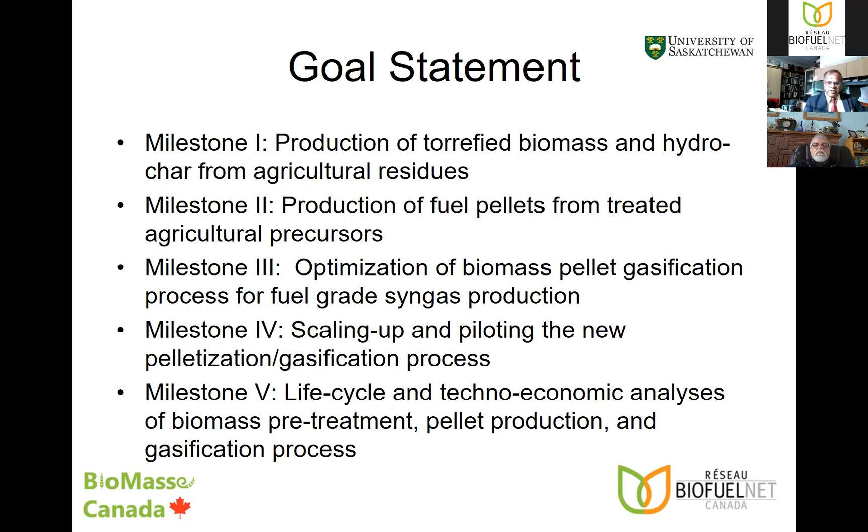Third one is the optimization of biomass pellet gasification process for fuel grade syngas production. And then the fourth milestone is the scale up and piloting the new pelletization gasification process. And the important one is the life cycle and techno-economic analysis based on the work that we would be doing from all 4 milestones related to biomass pretreatment, pellet production, and gasification process.

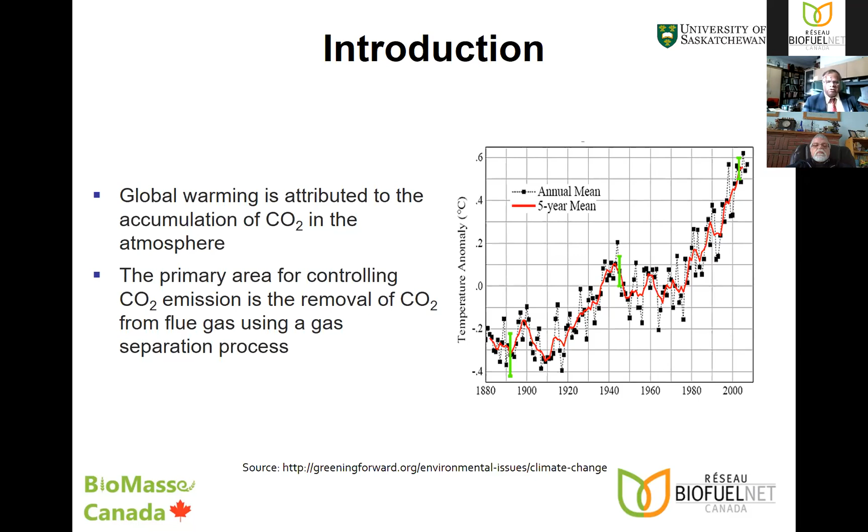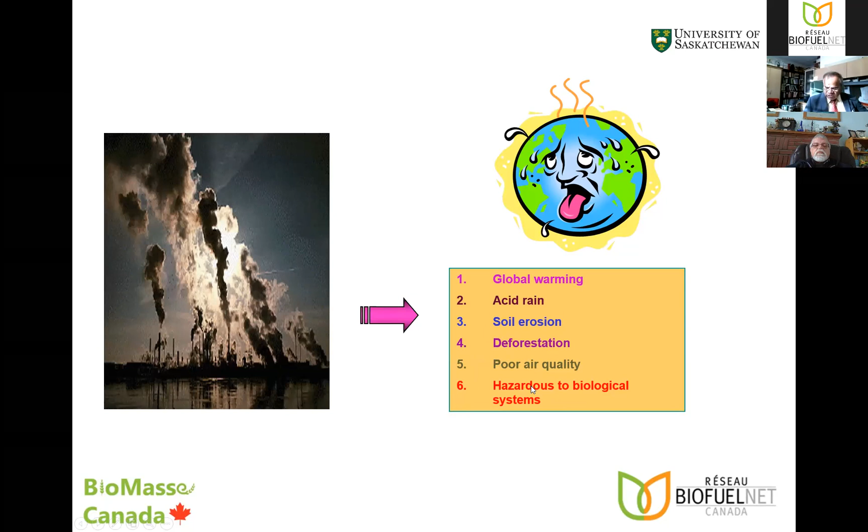And this cartoon again shows the impact of global warming. It causes acid rain, soil erosion, deforestation, poor air quality, and most importantly, it is hazardous to biological systems, including animal and human health.

And according to the Paris Accord, Canada has pledged to reduce its greenhouse gas emission by 30% below 2005 levels by 2030. Developed countries, including Canada, are committed to spending at least $100 billion a year between 2020 and 2025 to help emerging economies deal with the effects of climate change.

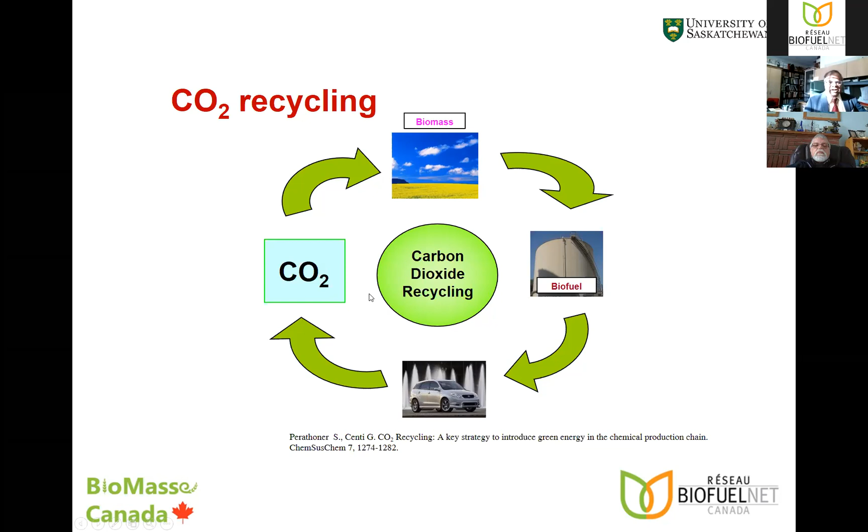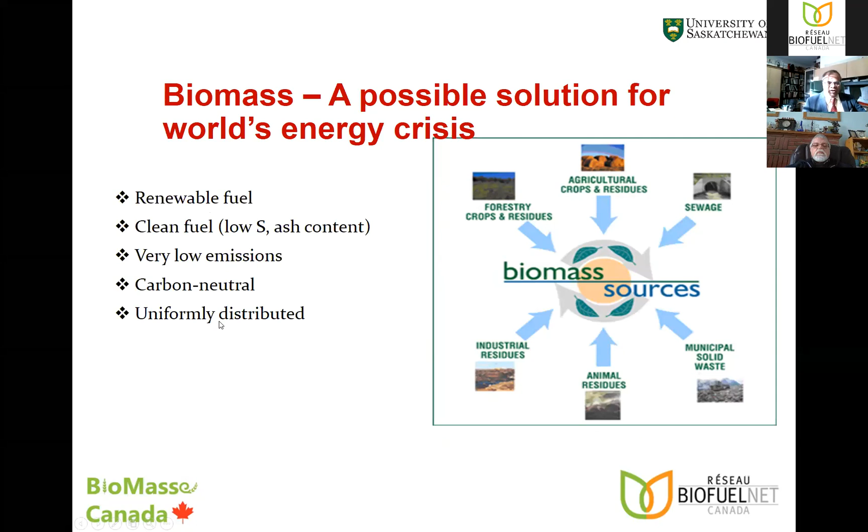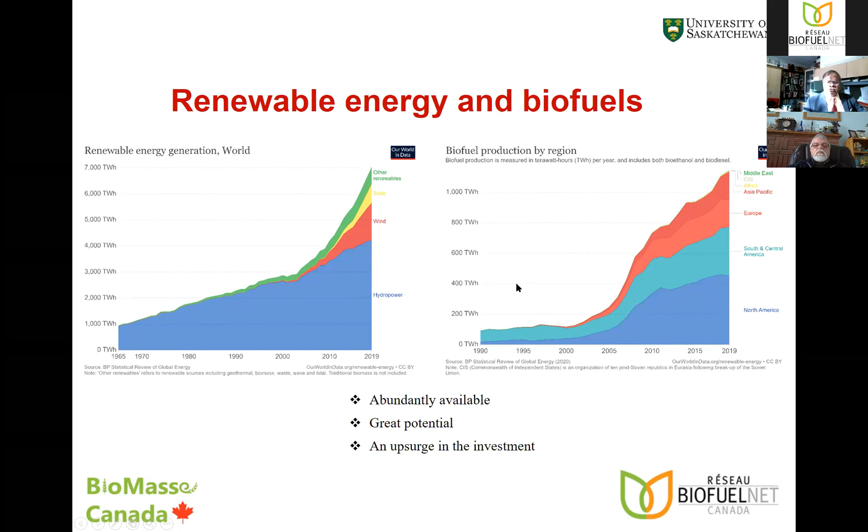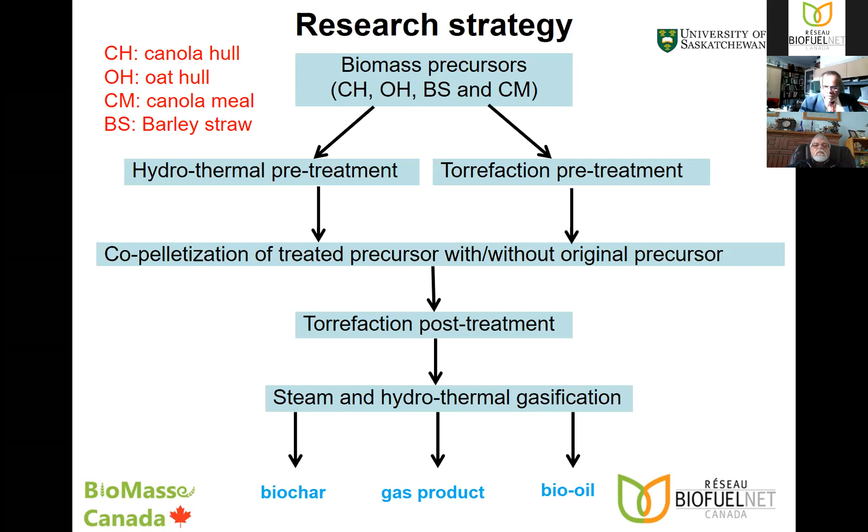So the strategy of this research has been twofold. One is to take these biomass precursors, the canola hull, oat hull, canola meal, barley straw, and mustard meal, and process them through a hydrothermal and torrefaction pretreatment process, and then co-pelletize with and without the original precursor, and also torrefy the post-treatment material, and then get useful products from this material, such as syngas through gasification technology.

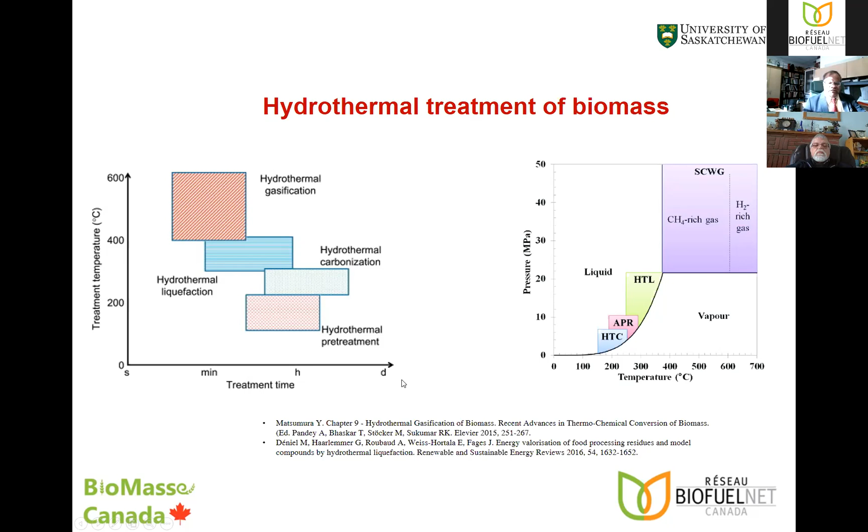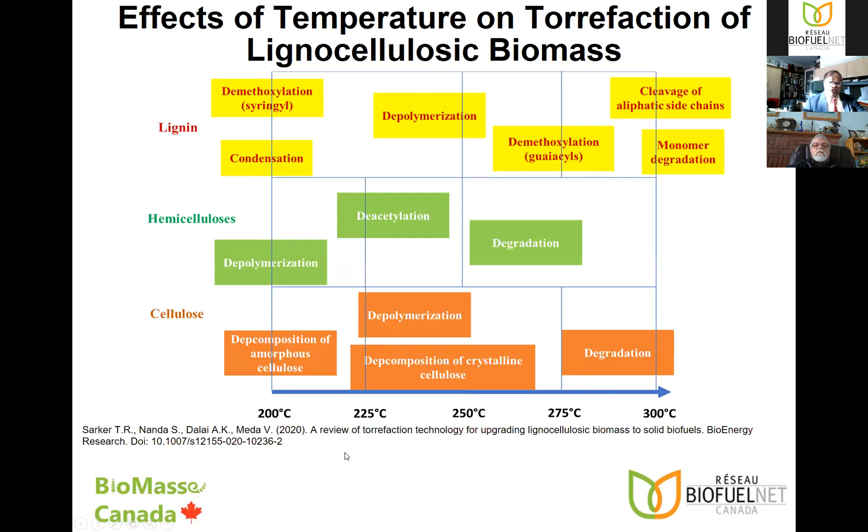And if you look at the bottom here, the hydrothermal carbonization, that's where we generate a lot of biomass with a large amount of carbon, and that translates to the one on the left, the hydrothermal pretreatment, where the temperature varies from about 100 to about 300 degrees Celsius to carbonize this material for pellet production. And in this slide, we see the effects of temperature on torrefaction of lignocellulosic biomass. Lignin, hemicellulose, and cellulose, the main components of biomass, go through different degradation processes as we increase the temperature from 200 to 300 degrees Celsius during torrefaction.

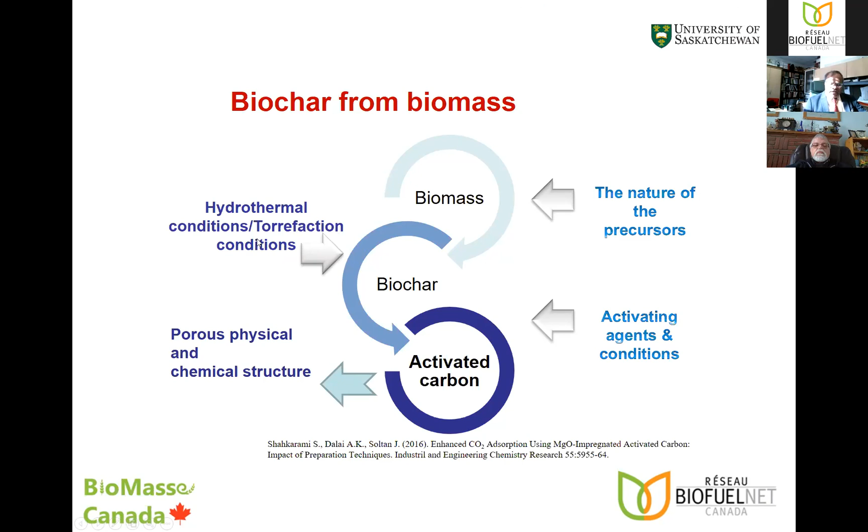And when we look at the biochar production before we pelletize it, the nature of this product depends on the nature of the precursor, and also the hydrothermal and torrefaction conditions, including the temperature range, the heating pattern, and the way we treat them in the reactor. So if you look at the torrefaction technology, as you see here, the temperature varies from 200 to 300 degrees C, and the time is 10 to 60 minutes, up to about 1 hour, with inert gas.

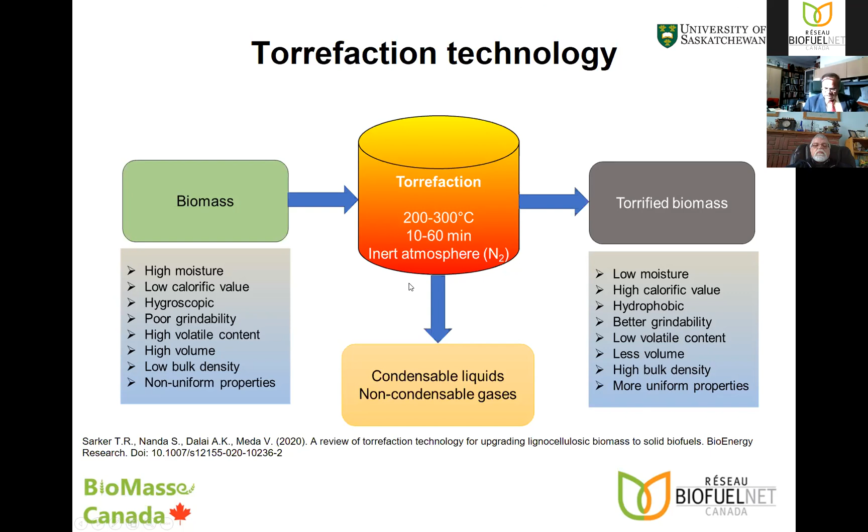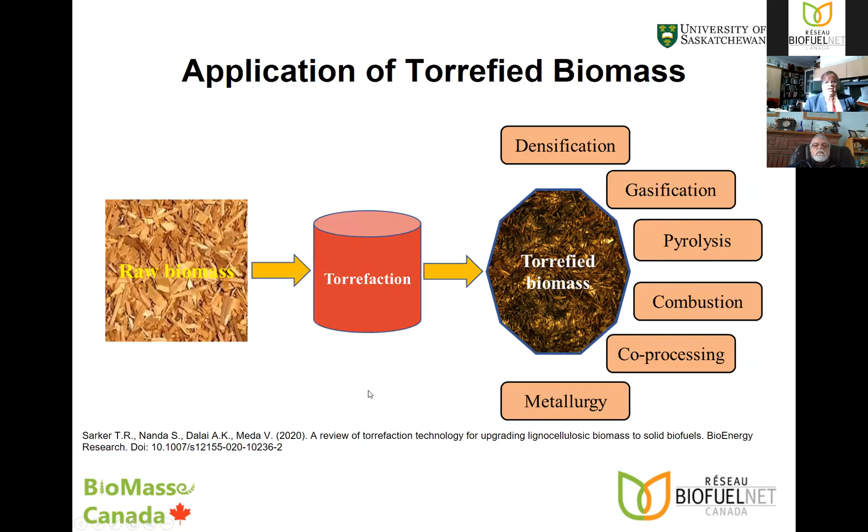And once you torrefy this biomass, you can see that it has many applications. You can do the pyrolysis, combustion, and you can apply for metallurgical application as well. You can gasify, you can co-process. There are a lot of things that can be done with the torrefied biomass.

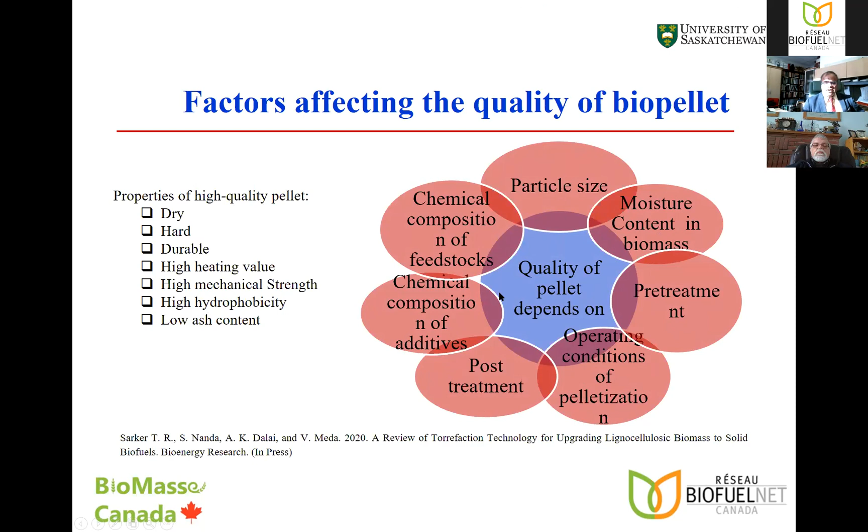And what are the factors affecting the quality of biopellet? The properties of high quality pellet include dry, hard, durable, high heating value, high mechanical strength, high hydrophobicity, and low ash content. And the quality of pellet depends on many things here: the particle size, the initial moisture content of the biomass, the pre-treatment methods, operating conditions for pelletization, post-treatment, chemical composition of additives, chemical composition of feedstocks.

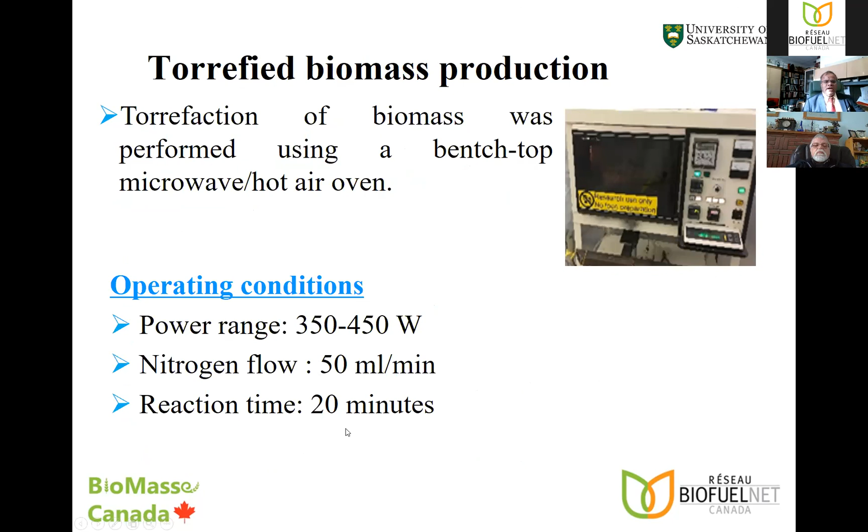And the torrefaction of the biomass we conduct in a benchtop microwave hot air oven reactor, as you see here, and the power range is given, and we do it in nitrogen inert atmosphere, and the reaction time is 20 minutes. So we're producing torrefied biomass as well as the hydrochar through this

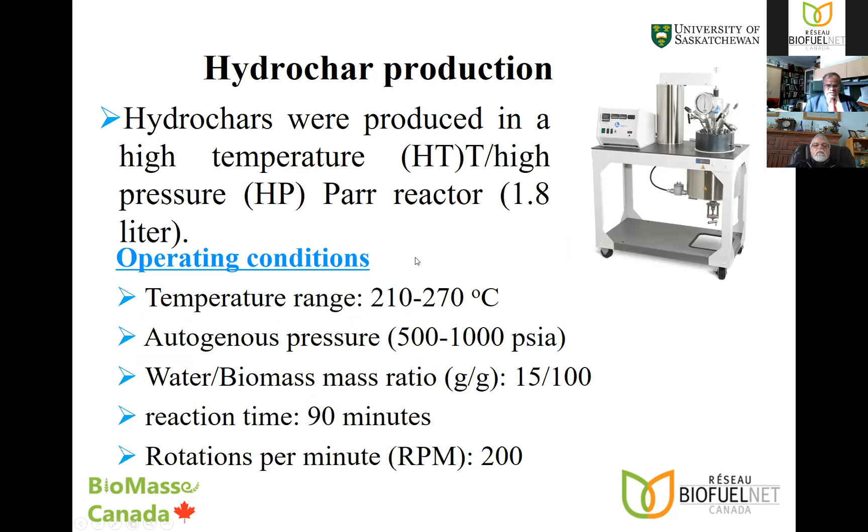carbonization process. And once we do the torrefaction through the microwave oven, you can see that we have barley straw, oat hull, and canola hull, and we subject these to three different temperatures: 220, 260, 300 degrees C for 30 minutes and 60 minutes, and you can see how physically they look, and they gradually produce char, which has more carbon content, less volatiles, less moisture, etc.

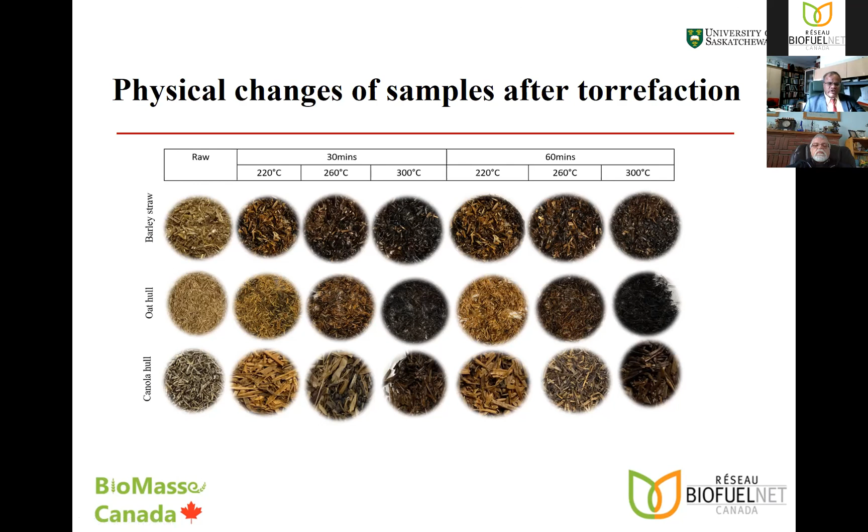And again, these are a lot of numbers, but all I want to tell you is that for the oat hull and barley straw and canola hull, when you subject that to about 300 degrees C through torrefaction for about 60 minutes, we increase the higher heating value from 17 to 20, to roughly 23 or 25 megajoules per kg. So that is one conclusion from this. And also the energy density, which is the energy density of the product over the energy density of the feedstock, has gone up about 37% and 42% in some cases. So energy density is also increased after this torrefaction process.

And also the mass yield and energy yield are varied when you subject this material to torrefaction, and we find the mass yield, which is basically the final weight over initial weight, and here is the energy yield, which is the final weight of the biomass times final higher heating value over the initial weight of biomass times initial heating value. So they are different as you go from 220 to 300 degrees Celsius. In some cases, you can see the energy yield about 92%. And when you subject to very high temperature, both the mass yield and energy yield go down.

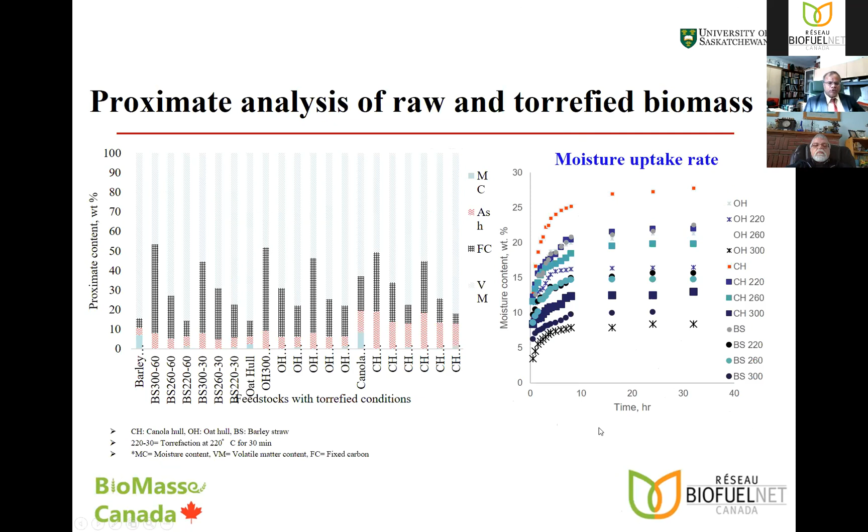And this one, again, is very, very crowded, but all I want to say is that once you torrefy this biomass, it becomes hydrophobic, and the moisture uptake is reduced to some extent. So I just wanted to conclude this part of the presentation.

We find that the torrefaction increased the higher heating value of oat hull by 37, 42, and 32% respectively, and significantly reduced the moisture uptake rate and made the material hydrophobic. And the TGA analysis showed that the torrefaction process makes this material thermally stable, and of course, again, it becomes hydrophobic.

So then we take this torrefied biomass and we wanted to densify it with, again, these are the precursors, canola hull, canola meal, oat hull, and here is the bench scale extruder that we used, with the biomass to water content varied from 1.75 to 2.5. And also we used the canola meal as an additive 50 by 50 on a weight basis. And so we mix them with these parameters, and then subject them to a bench scale extruder to produce the pellet.

And here is the material, the hydrochar, and also the one mixed with the canola meal 50-50, and here is the biomass to water ratio, and here is the relaxed density, which is the density that is measured after 2 weeks. So what happens is when we make the pellet, the density is a bit higher, and after 2 weeks, it expands to some extent. We found that this density is much more valuable or appropriate than the density if you measure just after you pelletize.

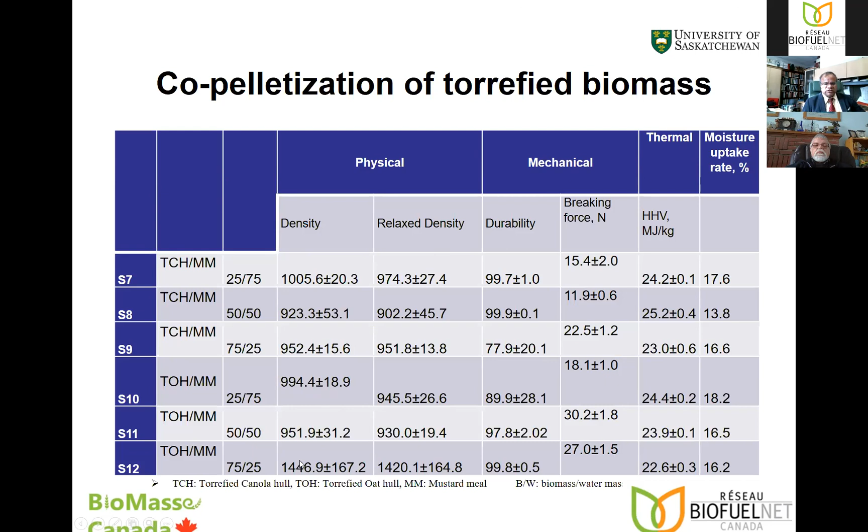And also we looked at the co-pelletization of torrefied biomass with the mustard meal. Again, this is a new material we wanted to test, and we find that the higher heating value is good. The moisture uptake is low to some extent after we made the pellet, and the relaxed density is also very good, and the density you can see is pretty good as well.

So what is the relevance of this work for industrial applications? We find that in 2019 the total production of canola, barley, oat were 19.5, 10.4, and 4.3 million tons respectively in Canada, and 10.9, 4.4, 2.2 million tons in Saskatchewan. So it's about half of Canada's production in all cases. And the amount of canola hull collected is about 10% of the product. So you can see a lot of this material is generated in Saskatchewan, and oats contain about 20 to 30% oat hull. So the idea is to use all this material to produce high quality pellets.

And the relevance to the Canadian scenario is that Canada's per capita greenhouse gas emission is about 20 tons of CO2 equivalent, which is one of the top emitters in the world. And co-firing of fuel pellets with coal is a promising method to drastically decrease the greenhouse gas emission from coal-fired power plants. And these pellets can also be exported to Asia and Europe to produce revenue from agricultural residues. And there are many critical success factors of this project to improve the pellet property.

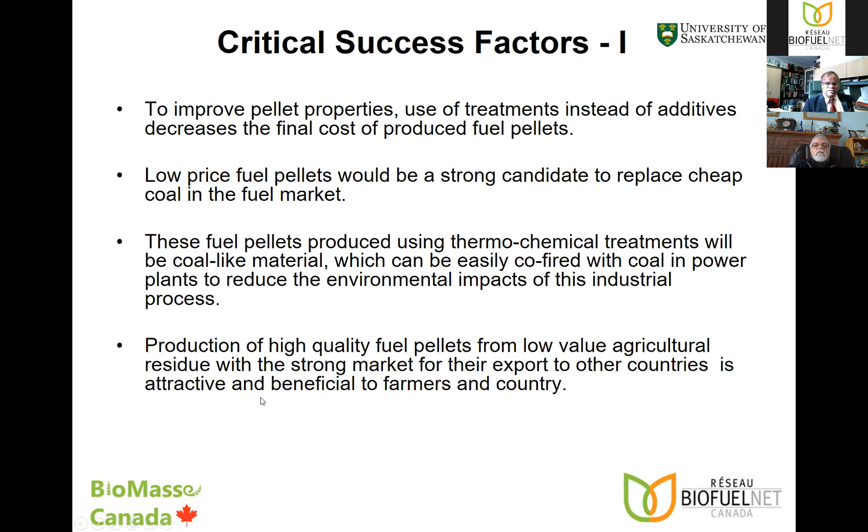Use of pretreatment instead of additive decreases the final cost of produced fuel pellets, and low price fuel pellets would be a strong candidate to replace cheap coal in the fuel market. And these fuel pellets produced using thermochemical treatment will be a coal-like material which can be easily co-fired with coal in power plants to reduce the environmental impact of this industrial process. And production of high quality fuel pellets from low value agricultural residue with a strong market for export to other countries is attractive and beneficial to farmers and the country.

And also there are technical challenges. One is looking at the mechanical strength, moisture resistance, and higher heating value of the pellets. These are very, very important to decrease the biomass fuel pellet production cost, optimization of the process conditions of the treatment process, and appropriate design and scale up of this process as required, and use of agricultural residue for production of biomass fuel pellets provides a new source of income to farmers.

Export of this product to other provinces and countries, again, is very attractive. And this is kind of the flow diagram for fuel pellet production. You can see we have the collection of the raw material and chopping, etc., hammering through a hammer mill, and then the microwave system for torrefaction. And here is the torrefied biomass, and then you grind them.

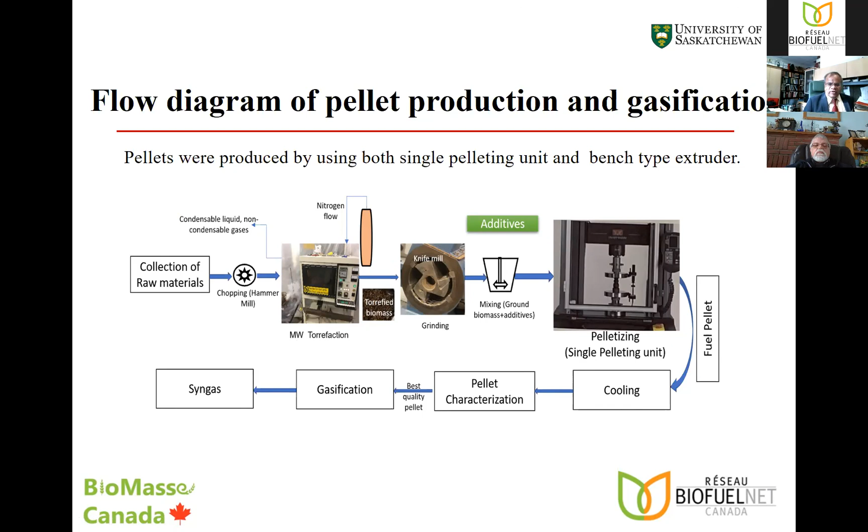And here is the mixing of the biomass with the additive, and here is the pelletization system, and then the pellet characterization to meet the standard, and then used for gasification. And that's part of our project, but they can also be co-fired with the coal for producing power in the coal-fired power plants as well, even for home heating for that matter.

And so the future work is looking at the optimization of the biomass pellet gasification process for fuel grade syngas production. And we have also projects on the conversion of syngas to transportation fuel or jet fuel. So that basically goes very well with the other projects. And we also want to work on the scale up and piloting of the new pelletization gasification process with the WD funding. We are in the process to get a pelletizer from Sweden, and that should be arriving fairly soon, so that we can look at piloting or scaling up with our recipe to produce large amounts of pellets.

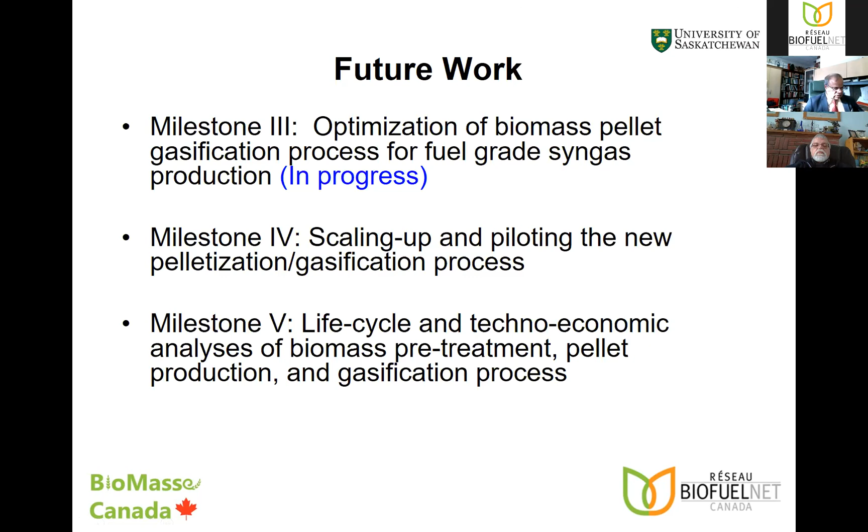So then we want to work on the life cycle and techno-economic analysis of biomass pretreatment, pellet production, and gasification process. So what is the take-home message? We want to use the pre-treatment, which not only can produce high-quality fuel pellets, but also makes their final price more competitive compared to that for cheap coal.

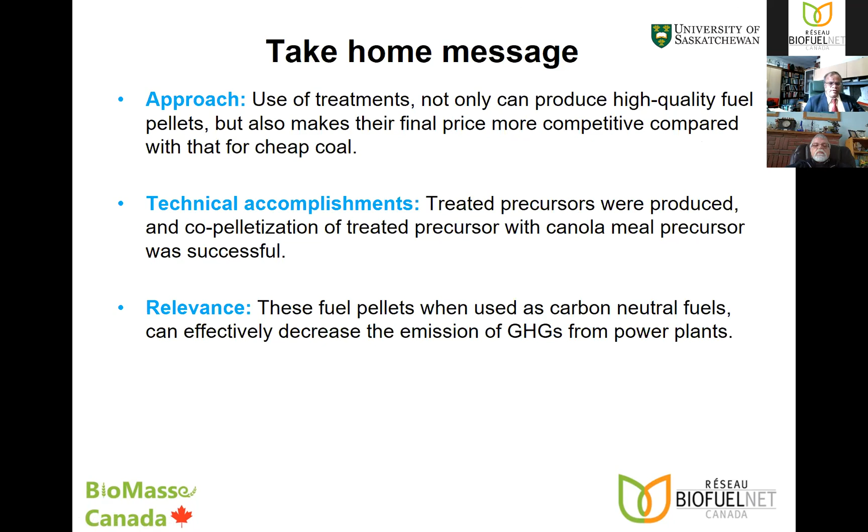And the technical accomplishments include: the treated precursor was produced, and co-pelletization of the treated precursor with canola meal was successful. Relevance: these fuel pellets, when used as a carbon neutral fuel, can effectively decrease the emission of greenhouse gas from power plants and also bring revenue to farmers and revenue for the country as well.

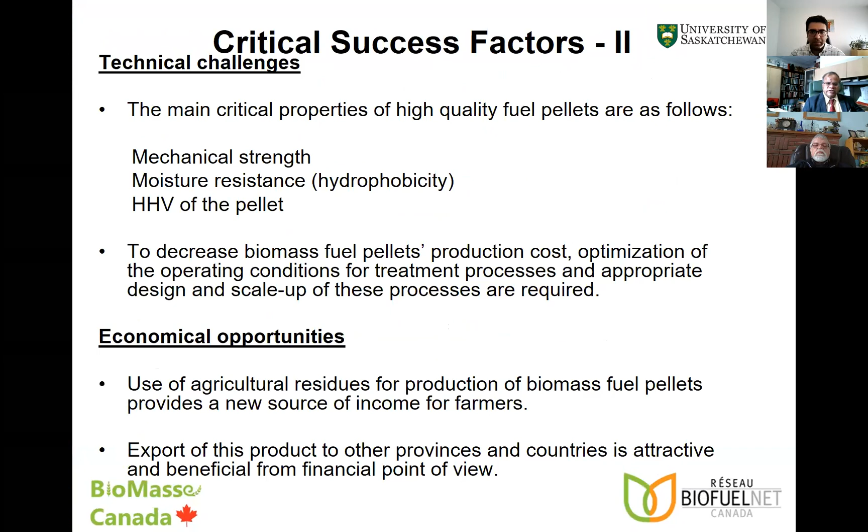I think, if you don't mind, I'll show you that mass yield slide, and that gives the direct indication of what was the yield of this material. So you can see this one, the mass yield through the thermal torrefaction process. You can see it varies from 44 to 42 to 68%.

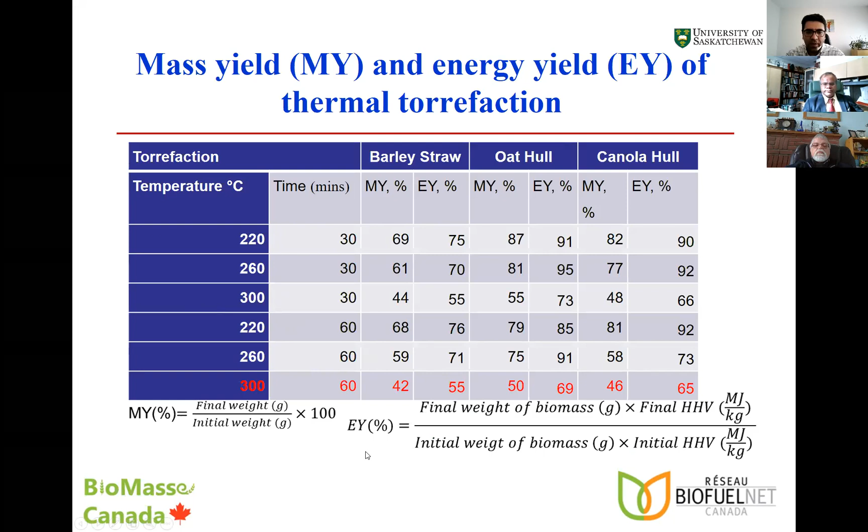So this is what we have here. Okay. Yeah. Thank you. And a follow-up question: did you use any binder to achieve such a high durability? That's a really, really good question.

I think we did a lot of work on the binders in the previous project, the BiofuelNet project, and here what we try to do is stay away from binder, because binder costs money, and we wanted to just take the torrefied material and then use the canola meal or the mustard meal to put them together to create the biopellet. And in these cases, we have not used a binder in what I presented today.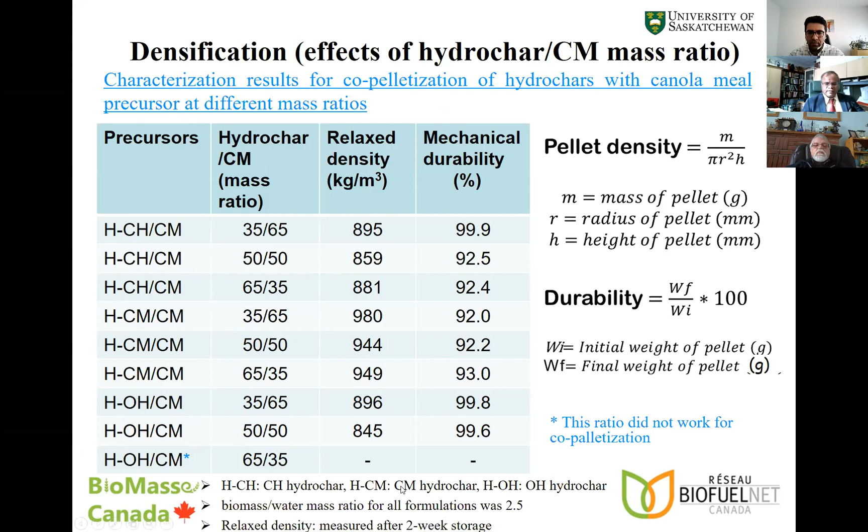Okay, so just a quick question, Ajay. You mentioned canola meal. Is that the same canola meal that already has an established market, or is this part of the waste in the canola oilseed crushing process? Actually, it's a good question. When we crush the canola, we get a canola meal which has a lot of protein, and it is used for animal feed.

But I think in the province we have a surplus quantity of canola meal, so what we try to do is remove part of the oil or the protein from the canola meal through a solvent extraction process, reduce that to some extent, and then use that for fuel pellet production. The canola meal has a really good market, but because of the surplus quantity of canola meal, we are trying to use part of that for fuel pellet production.

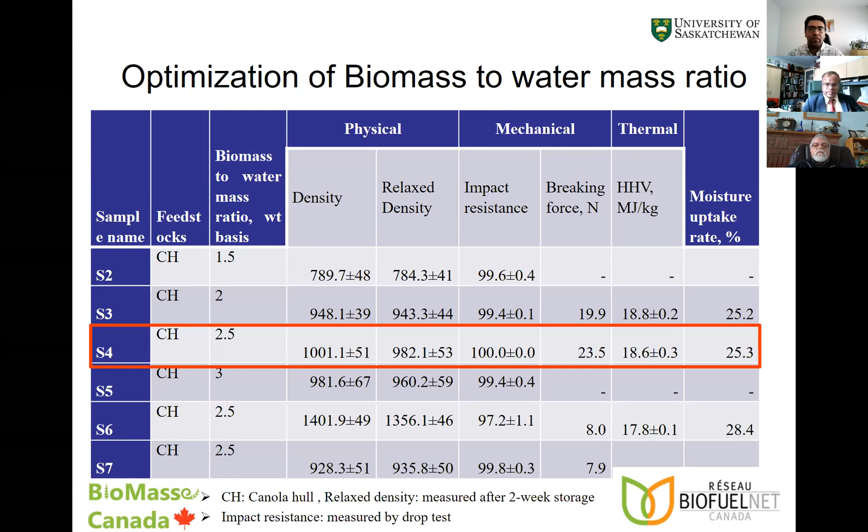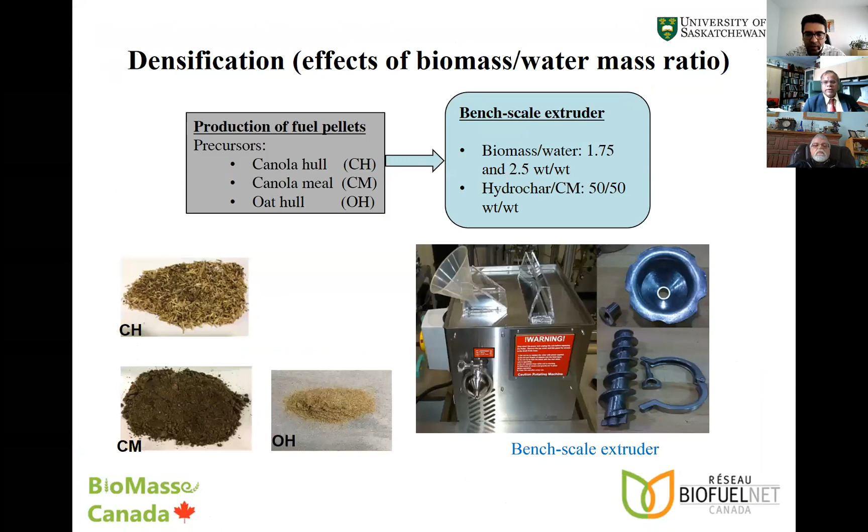Okay, great. So another question about the ash content, Ajay. The ash content of the torrefied material is much higher than the raw material. The European Union quality standard for fuel pellets requires ash content of less than 1%. How do you plan to attain lower ash content? That's a really good question.

But if you are going to use this for cogeneration with coal, for example, the ash content would not matter. And if used for home heating, maybe ash content doesn't matter. But in some cases, I think the ash content should be much lower. And if the ash content is lower, the energy value is also going to go up. So for certain applications, we don't have to do anything for the ash.